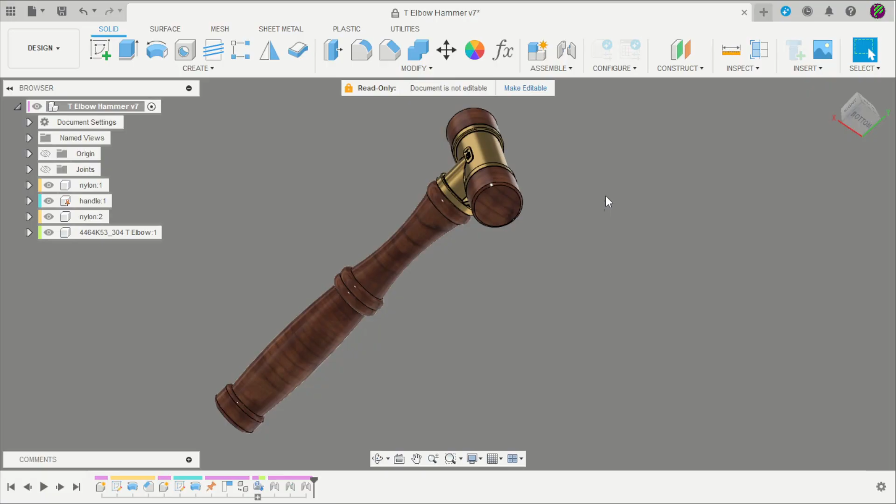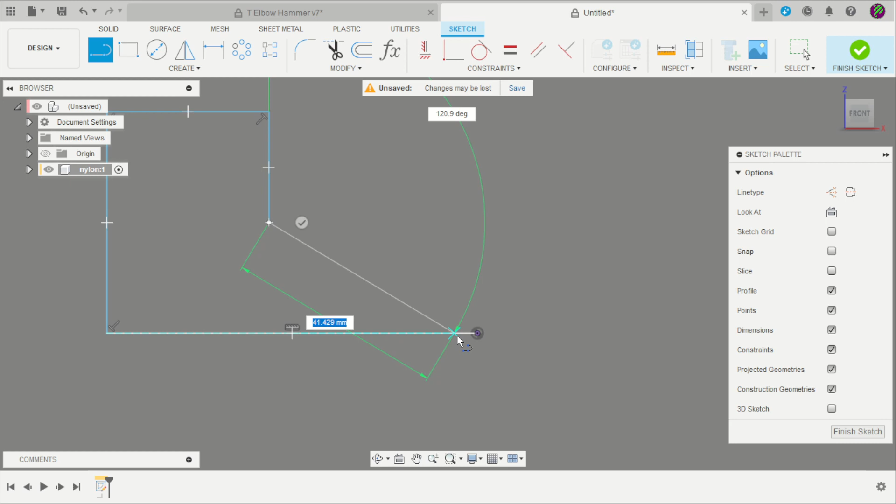Let's start. Create a new design. Start to create a new component. Here, that will be the nylon. Select the front plane. Start to create the profile. This is the profile that we need. Here. Change that line to a center line.

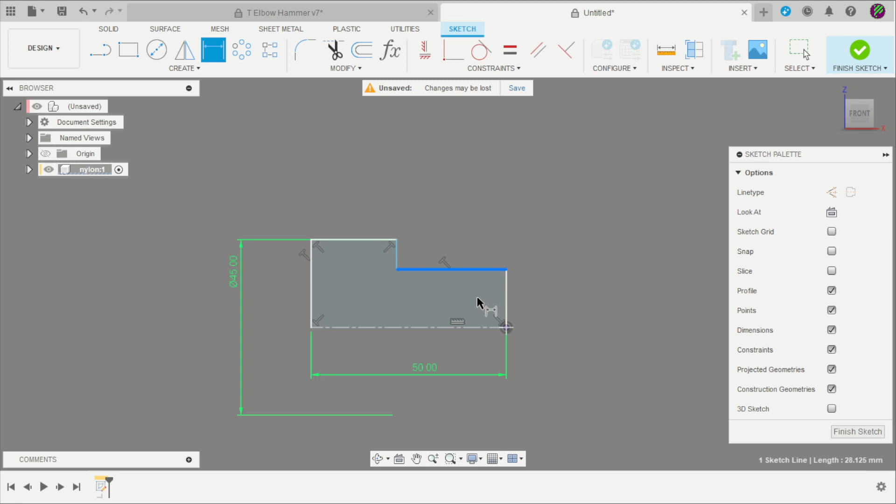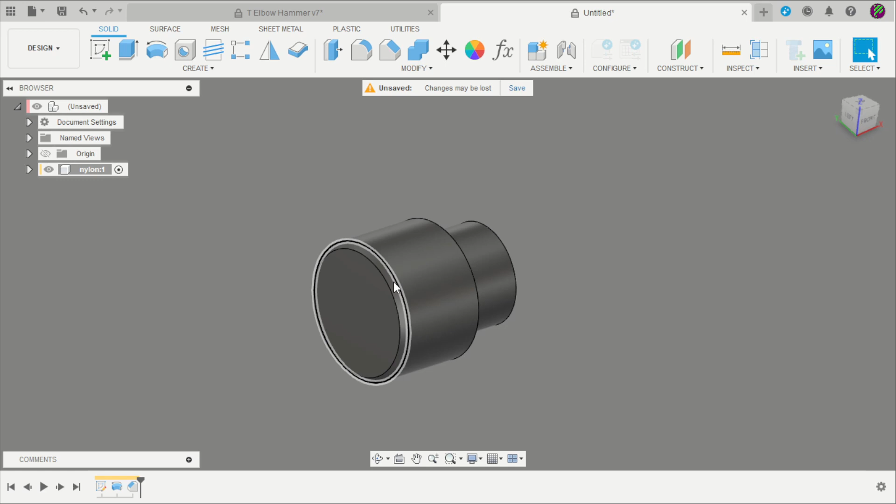The measurement is 50 millimeters. The diameter is 45. Here and here is 45. And the diameter here is 33 with 20 millimeters. Finish the sketch. Select the revolve tool. Partial we can change to full. And apply a chamfer of 2 millimeters. The first part is concluded.

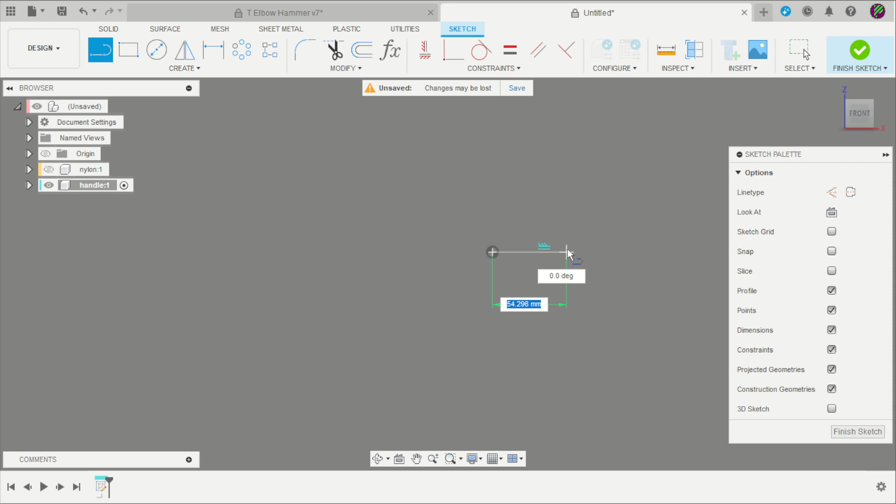Return to the main project. Create a new component that will be the handle. Click OK. Hide the first component. And here on the front plane, select to create the sketch. Let's start creating a line here. These lines need to be a center line. Start to create that part.

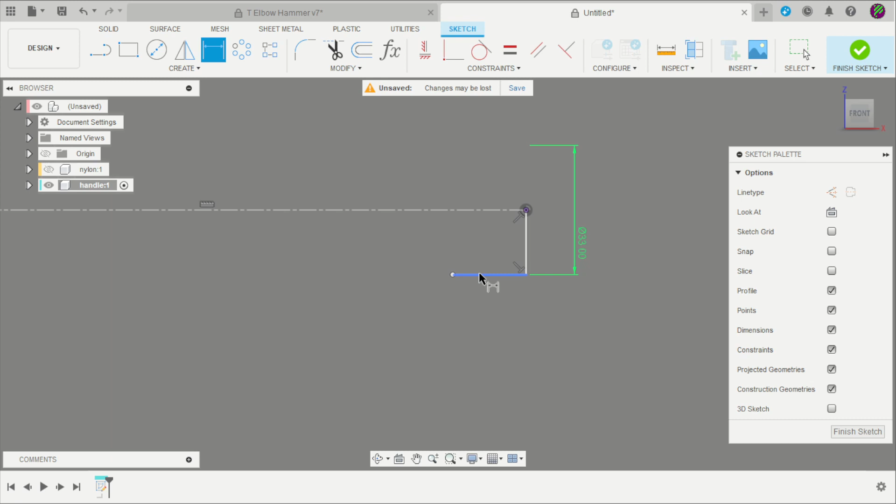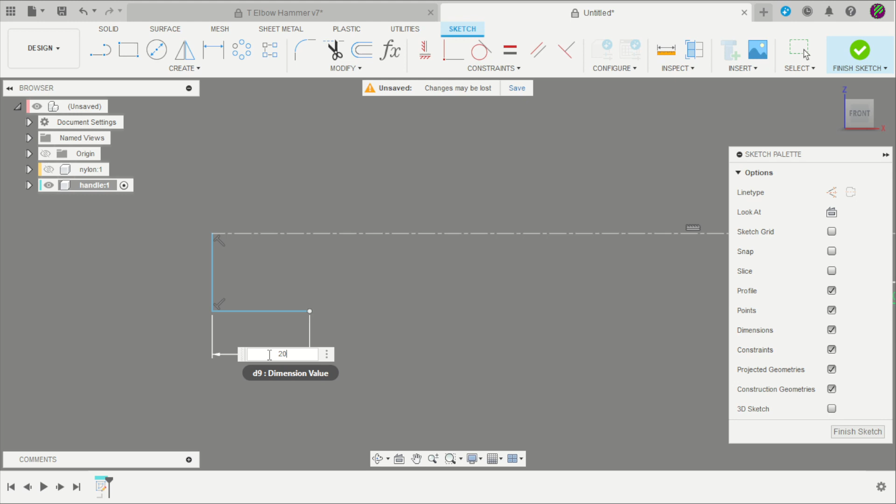This diameter is 33 and that distance is 20. Okay. In the other part, click here and here. Return to the drawings here. The diameter is 45 and the distance is 20. This is 20 millimeters and the diameter is 45. The whole length, this line is 300 millimeters.

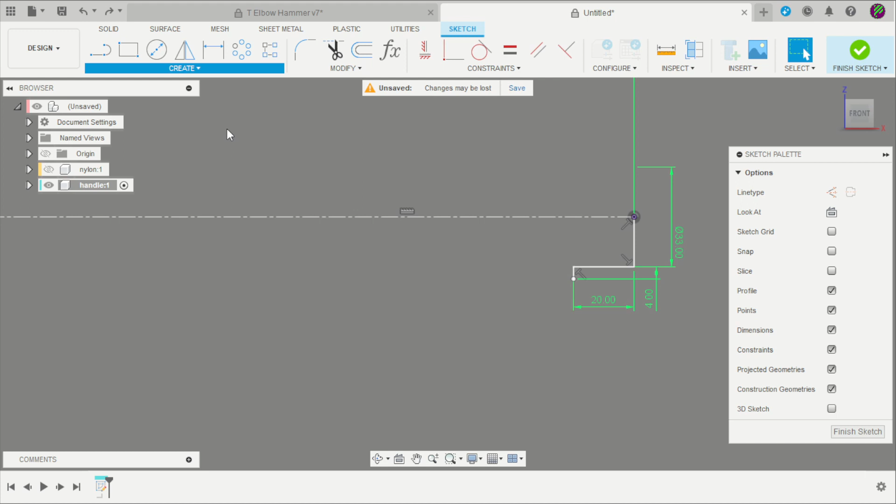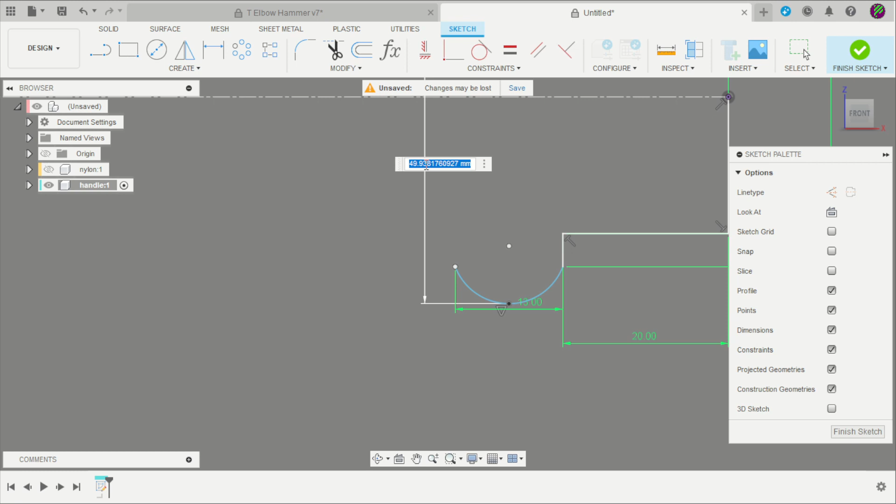Create another line here. This is 4 millimeters. Here. Now you can start to create an arc with 3 points. Select here. It is 13 millimeters here and here, 13 millimeters. Create here a point. Select the point here. And that distance to the center is 48. And that distance here to the center is 38.

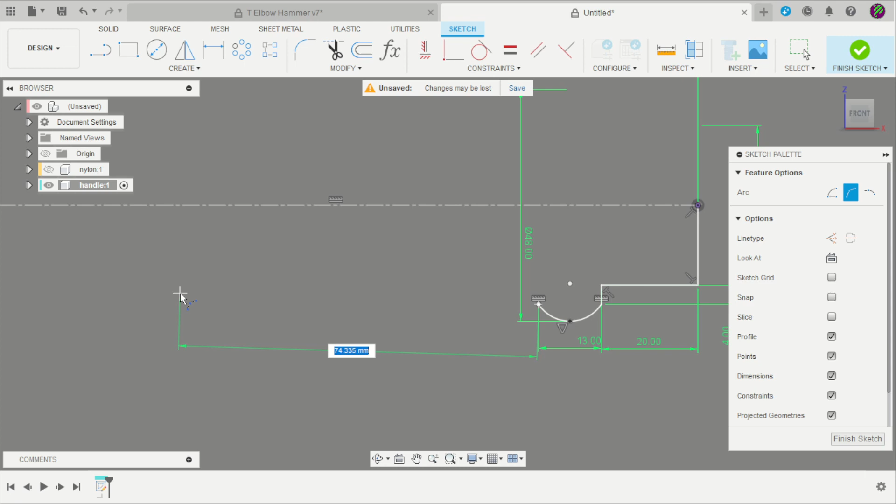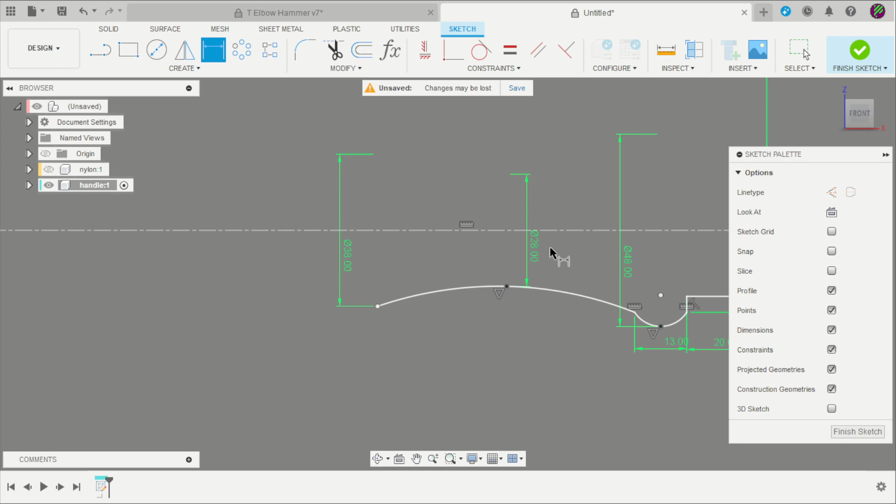Return here, we can change this distance to the horizontal. Apply here the same horizontal constraint and we can create another arc with 3 points here and here. Another point on the middle of the arc. Click here. This diameter is 38. This one is 28. And the distance is 97.

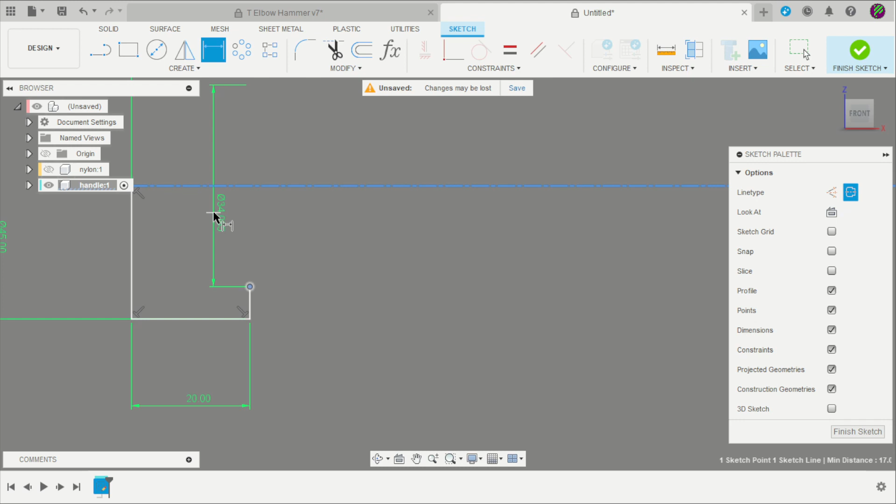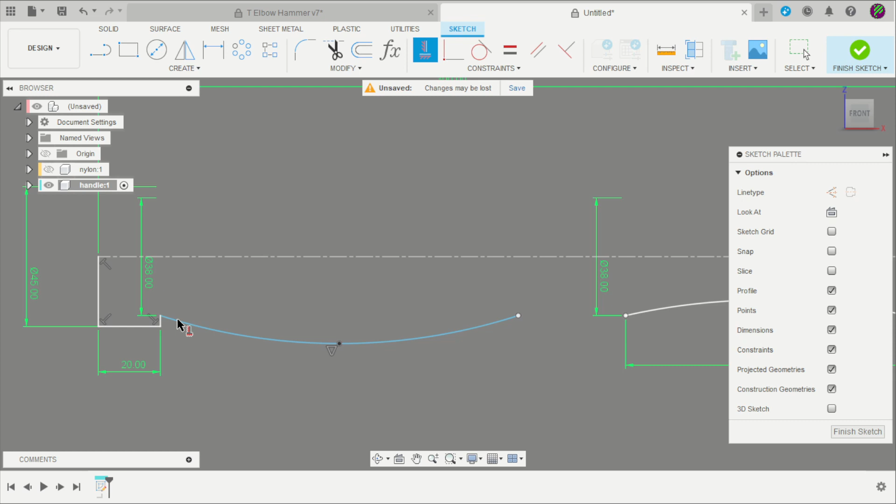Now we can return here to the other part. Create a line here. And that point to the center is 38 millimeters. And create a new arc of 3 points here and here. Create the point in the middle of the arc and start to apply the measurements, that is 45 diameter, 38 the other part. Here we can apply a horizontal constraint. This distance is 45, and the distance of these 2 points is 130 millimeters.

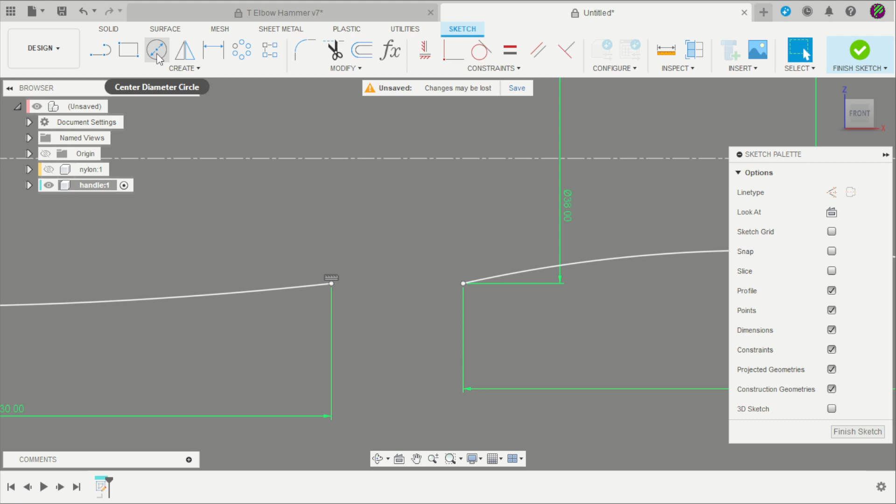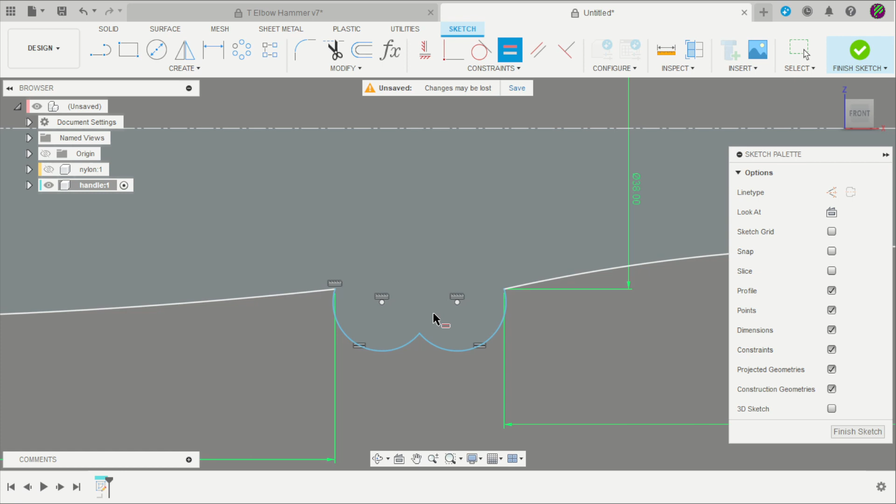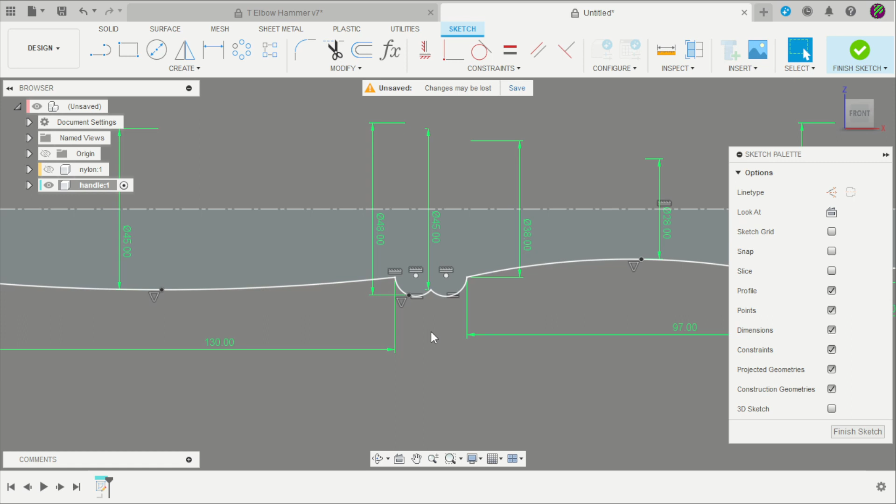Now we can create another 2 arcs with 3 points here and here. They are horizontal and the same measurement. Create a new point here in the middle and apply a distance of 48 and apply a distance here of 45. Finish the sketch. Now we have our profile. Select the Revolve tool, New Body, and click OK. Apply here a fillet on that edge with 3.5 millimeters. And we have our handle done.

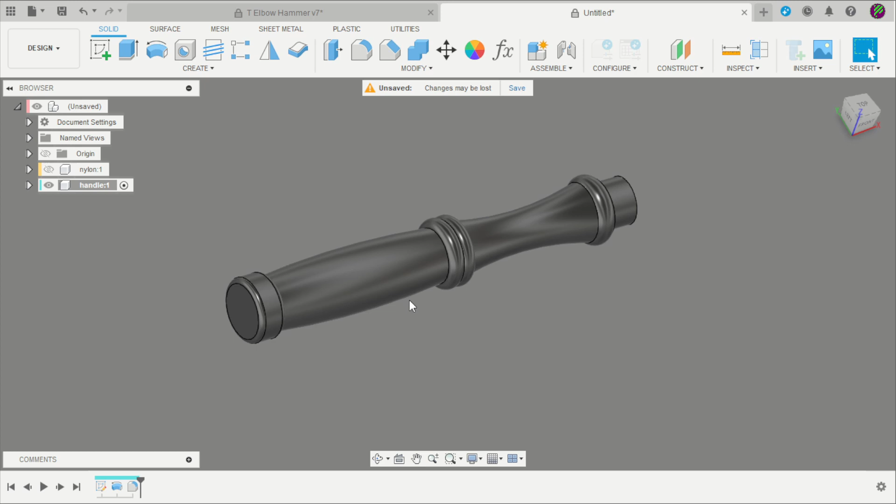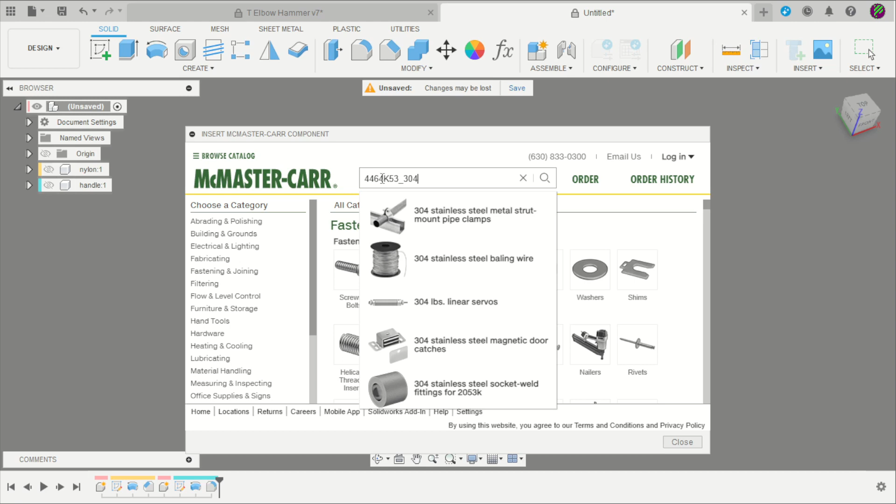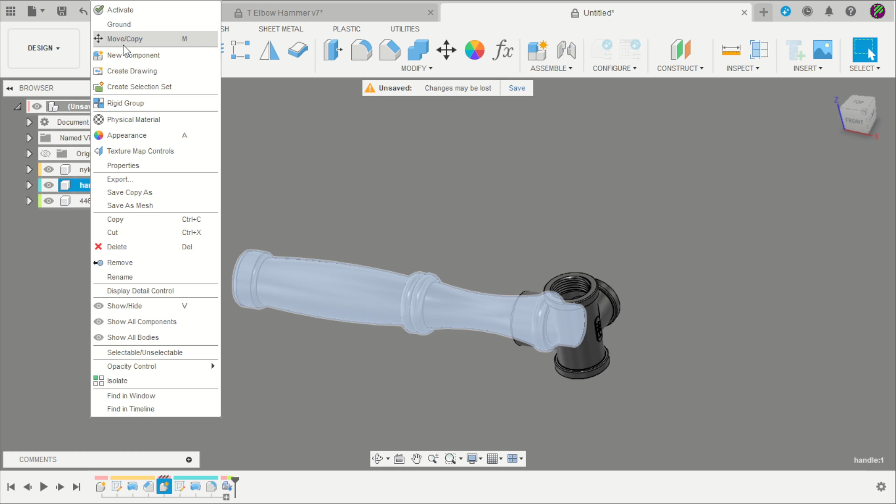Hide this component, return to the main project, select here on the list of parts, copy this code, Ctrl C, return to Fusion, and insert a McMaster. Paste that code, click Enter, change to STEP, and click Download. Click OK, confirm, show all components. Now we can fix this handle, right button and click Ground.

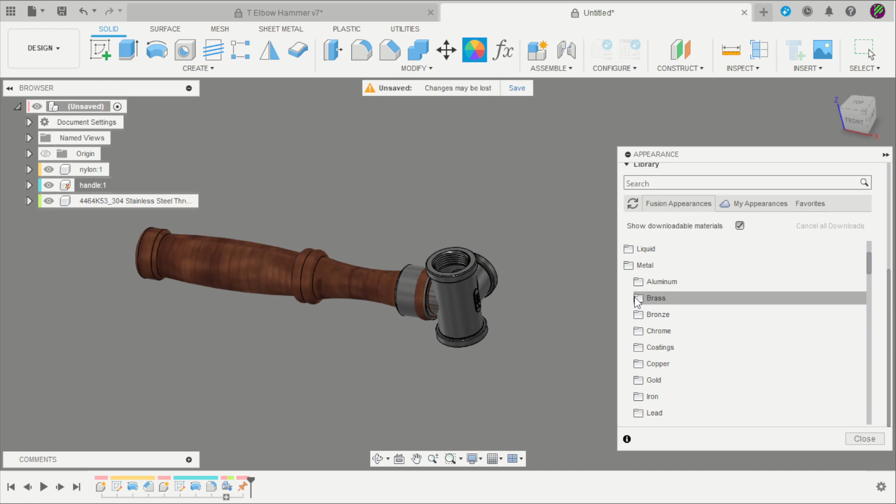Apply some colors here. This can be wood, cherry. This other one can be a brass. And this other one can be a nylon. Click OK. Move these components and start to assemble the project. J to create a joint.

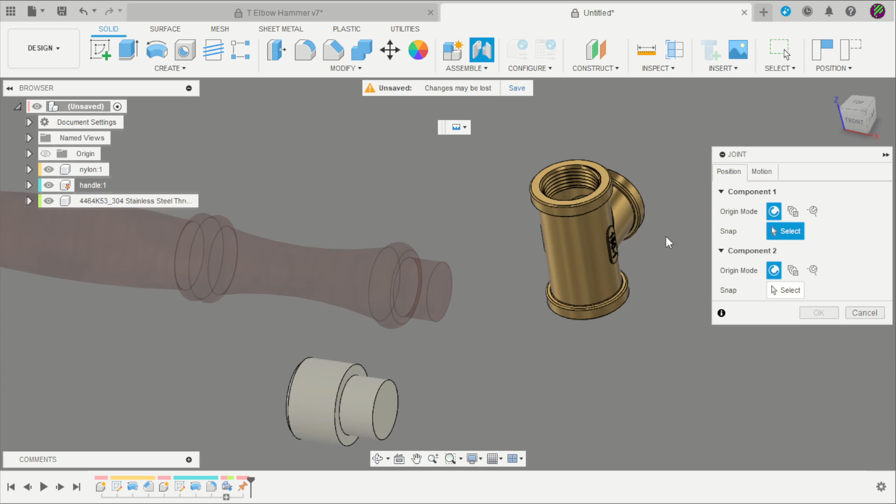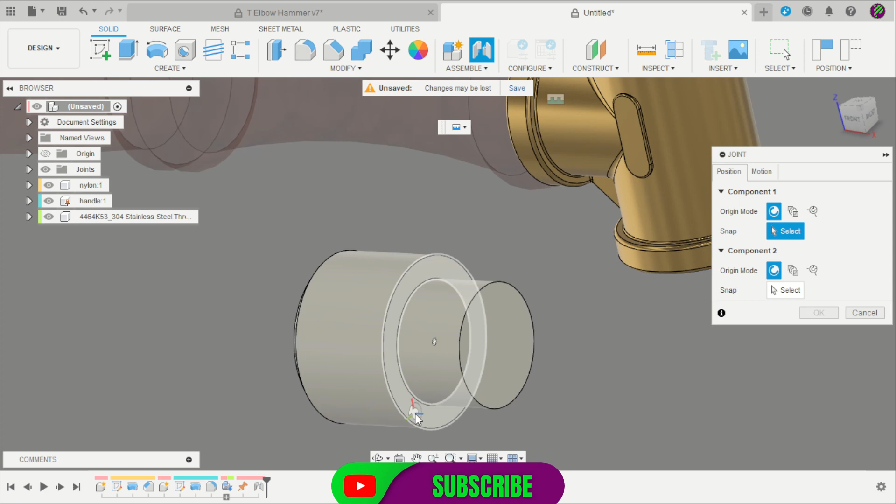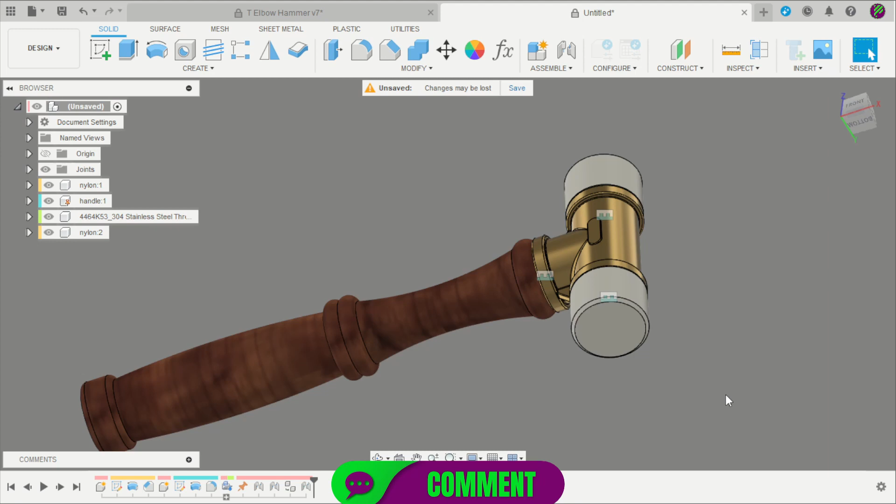Select that face, hold the Ctrl, click on the center point. And here, hold the Ctrl. Now we have our first component. And apply the same process here and here. And copy, Ctrl C, Ctrl V. Copy this component and repeat the assembly. And click OK. You can change here the scale to be more realistic. Here, finish the sketch. And now the T-elbow hammer is done. I hope you like it.